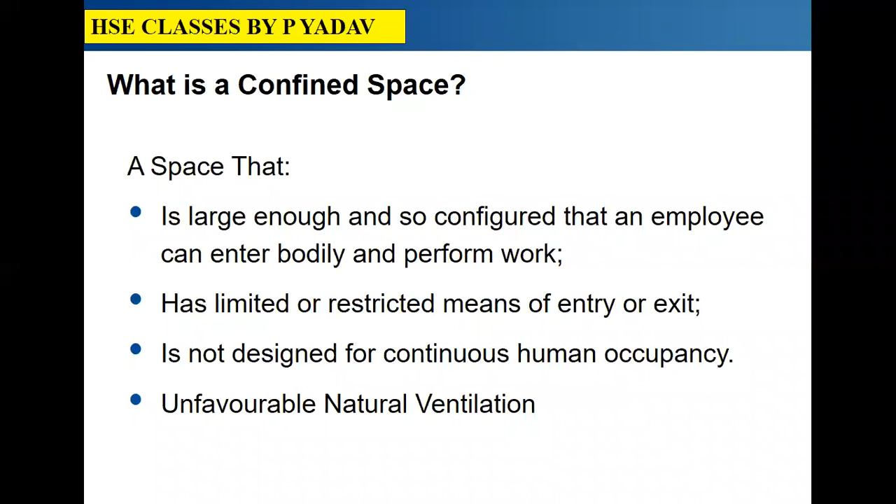What is confined space? A space that is large enough and so configured that an employee can enter bodily and perform work. A space that has limited or restricted means of entry or exit. A space that is not designed for continuous human occupancy. A space that has unfavorable natural ventilation. Just call it confined space.

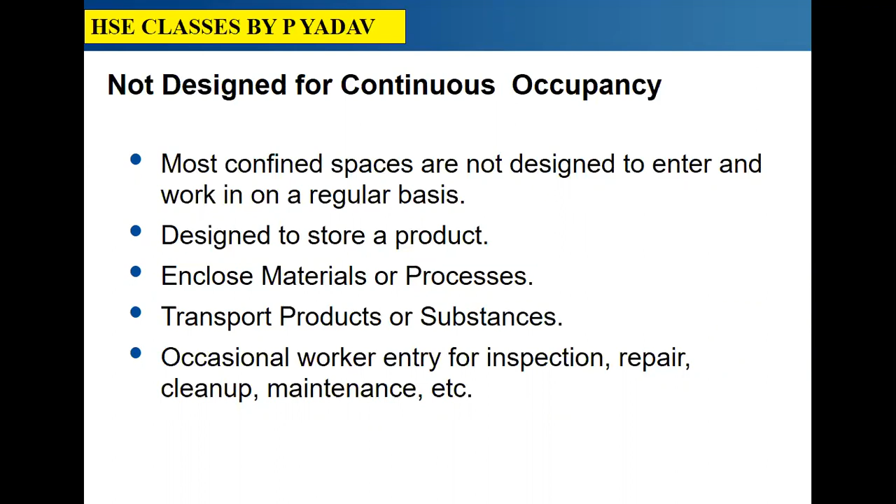Not designed for continuous occupancy. Most confined spaces are not designed to enter and work in on a regular basis, designed to store a product, enclose materials or processes, transport products or substances, occasional worker entry for inspections, repair, cleanup, maintenance, etc.

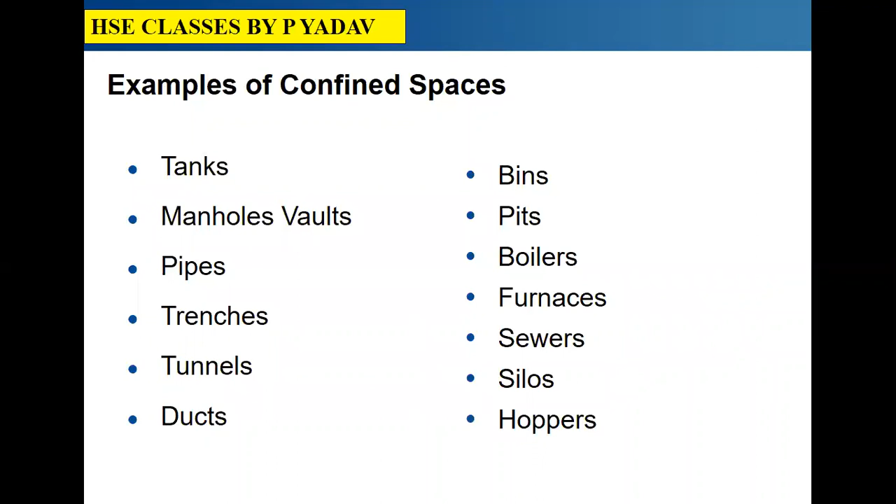Examples of confined spaces: tanks, manhole vaults, pipes, trenches, tunnels, ducts, bins, pits, boilers, furnaces, sewers, silos, and hoppers.

Potential hazards in confined space. Oxygen deficiency. Concentration. Combustibles: methane, hydrogen, acetylene, propane, gasoline fumes. Toxic materials: carbon monoxide, hydrogen sulfide, welding fumes, corrosives, electricity, mechanical hazards, mixers, crushers.

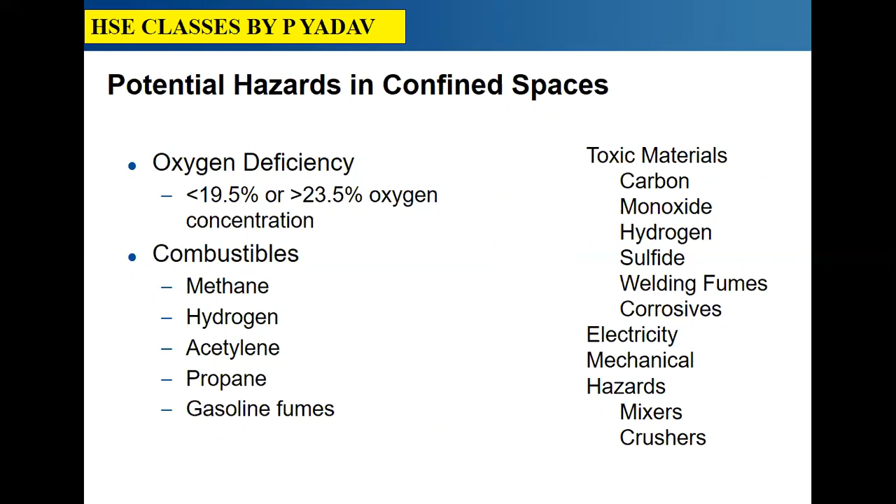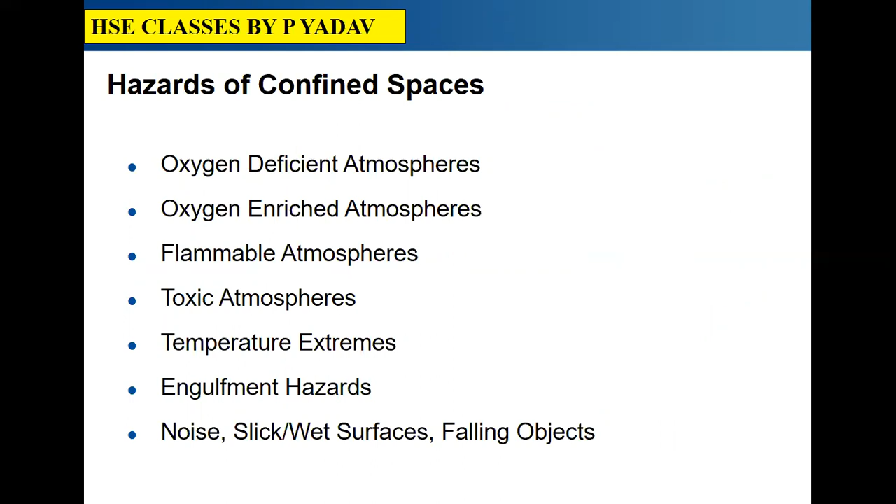Hazards of confined spaces: oxygen deficient atmospheres, oxygen enriched atmospheres, flammable atmospheres, toxic atmospheres, temperature extremes, and engulfment hazards, noise, slick, wet surfaces, falling objects.

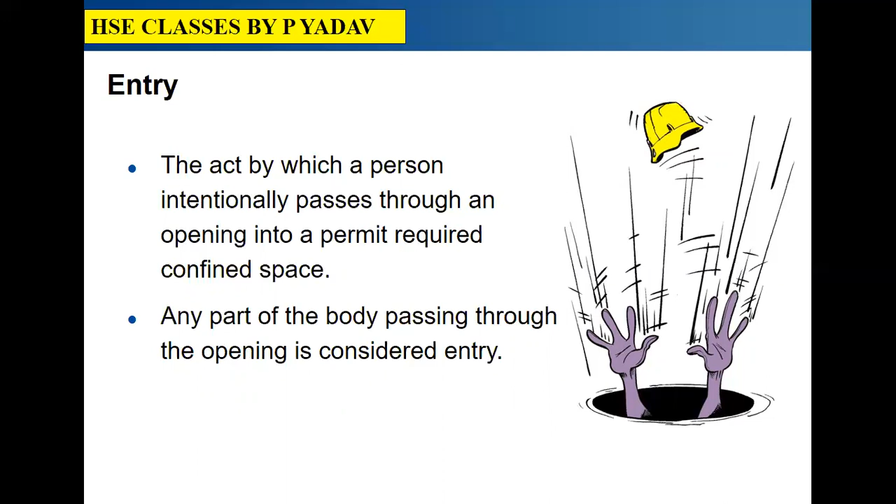Entry: the act by which a person intentionally passes through an opening into a permit required confined space. Any part of the body passing through the opening is considered entry. Immediately dangerous to life or health, IDLH. Any condition which poses an immediate threat to the health or life of an entrant, would cause irreversible adverse health effects, would interfere with an individual's ability to escape unaided from a permitted space.

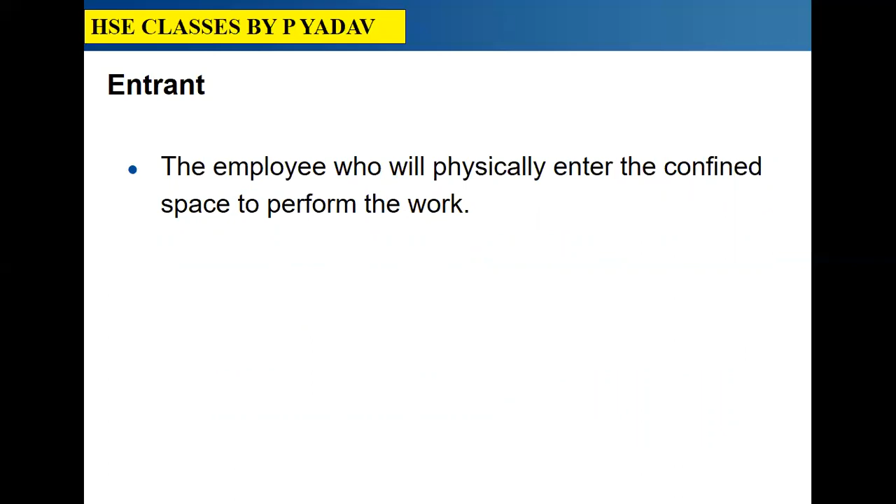Entrant: the employee who will physically enter the confined space to perform the work. Attendant: the employee who remains outside the confined space and monitors the entrants, guards the space against unauthorized entry, warns the entrants of any unusual conditions, and summons the rescue personnel if needed.

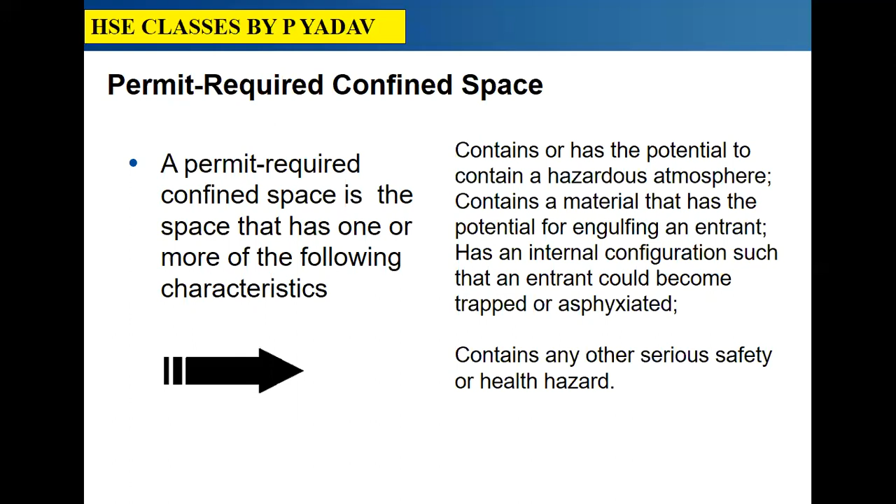Permit required confined space. A permit required confined space is the space that has one or more of the following characteristics: contains or has the potential to contain hazardous atmospheres, contains a material that has the potential for engulfing an entrant, has an internal configuration such that an entrant could become trapped or asphyxiated, contains any other serious safety or health hazard.

Categorizing workspace. Space large enough to enter and limited or restricted entry or exit and not designed for continuous worker occupancy. If no, not a confined space. If yes, then confined space. Hazardous atmospheres or engulfment hazard, configuration hazard, or any other recognized serious hazard. If yes, then permit required confined space. If no, non permit required confined space.

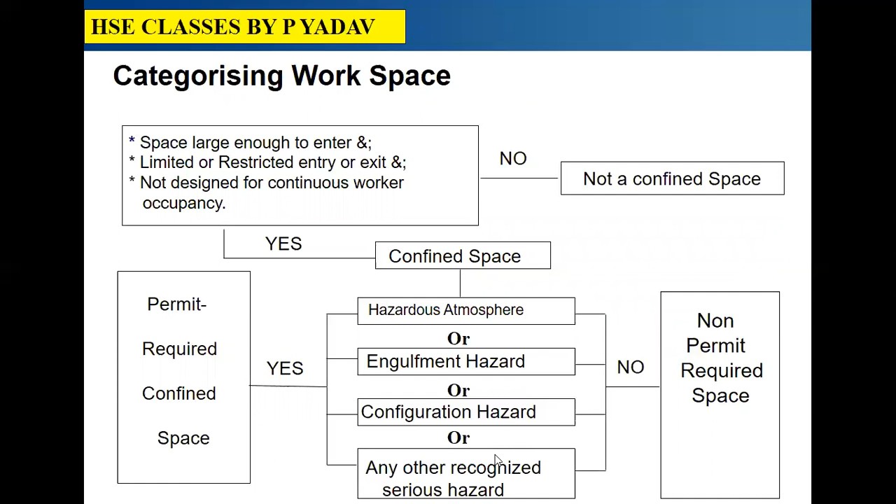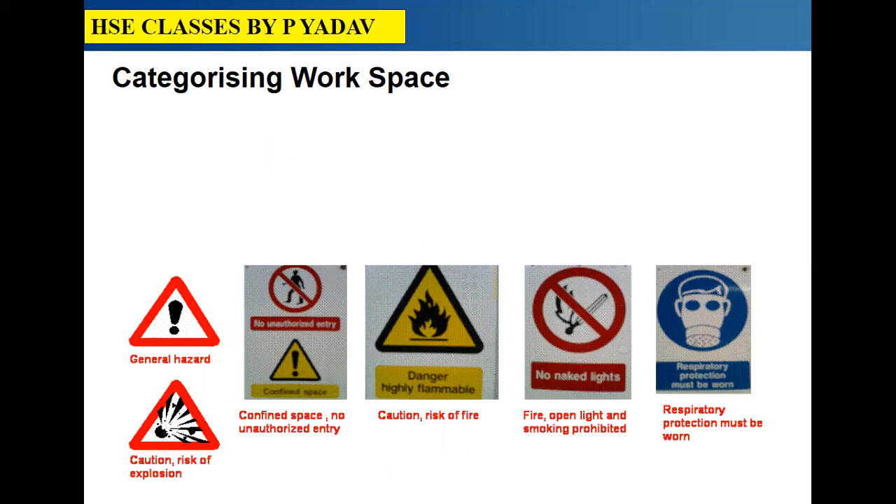Warnings. Warning signs shall be displayed at or near every access point to a confined space to warn persons of the existence of the confined space when entry to the confined space is possible. Such warning signs must be complied with.

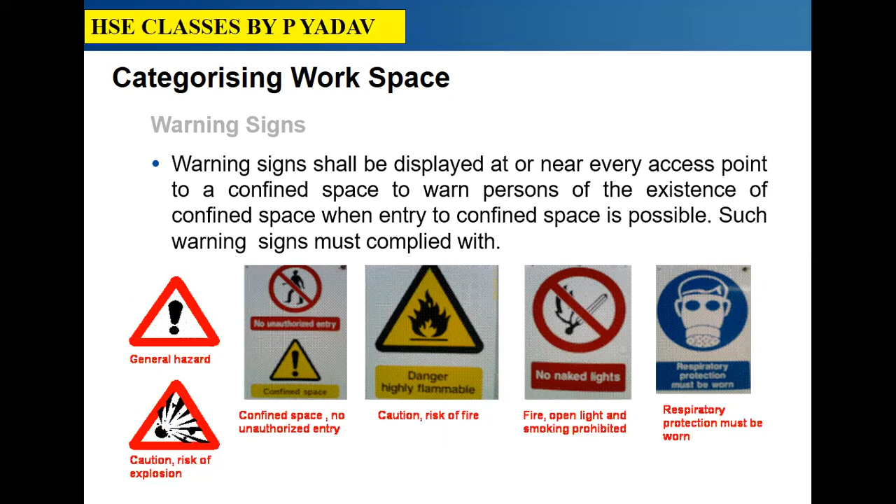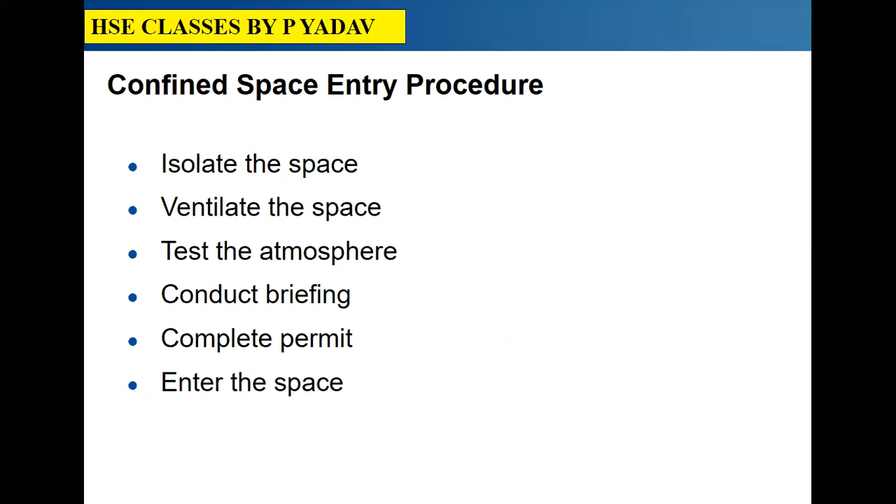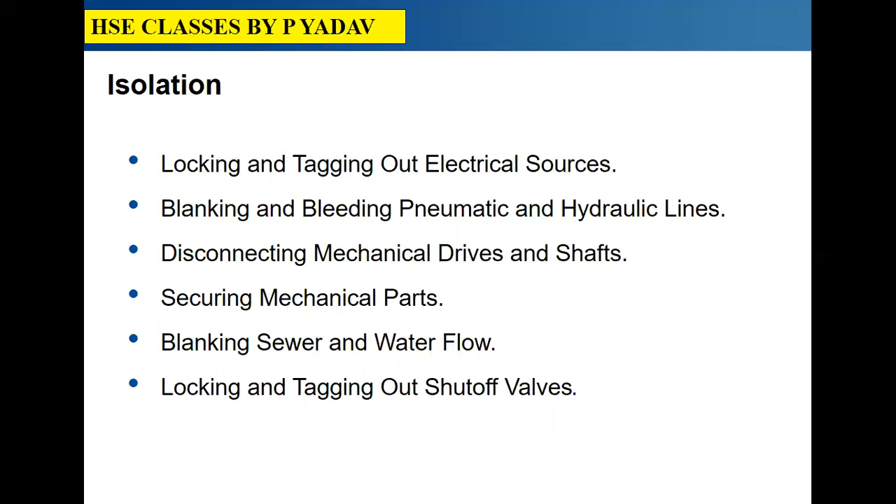Confined space entry procedure: isolate the space, ventilate the space, test the atmosphere, conduct briefing, complete permit, enter the space. Isolation: locking and tagging out electrical sources, blanking and bleeding pneumatic and hydraulic lines, disconnecting mechanical drives and shafts, securing mechanical parts, blanking sewer and water flow, locking and tagging out shut-off valves.

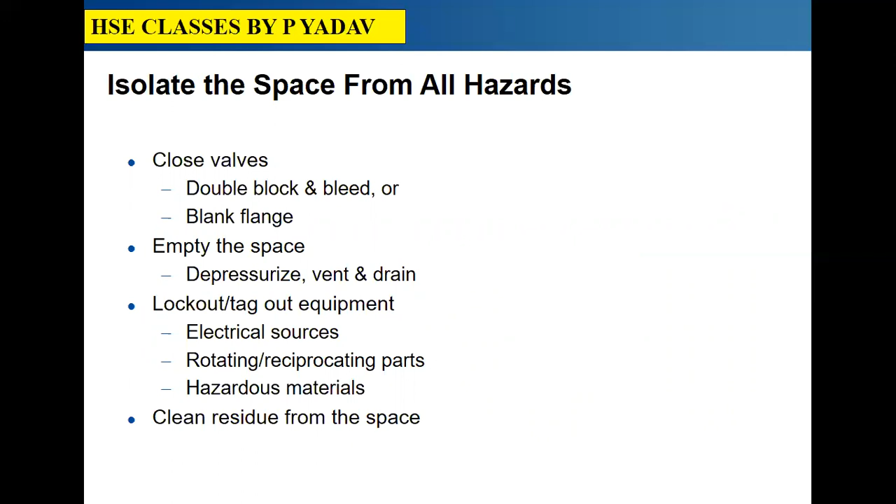Isolate the space from all hazards. Close valves, double block and bleed or blank flange. Empty the space. Depressurize, vent and drain. Lock out, tag out equipment, electrical sources, rotating and reciprocating parts, hazardous materials. Clean residues from the space.

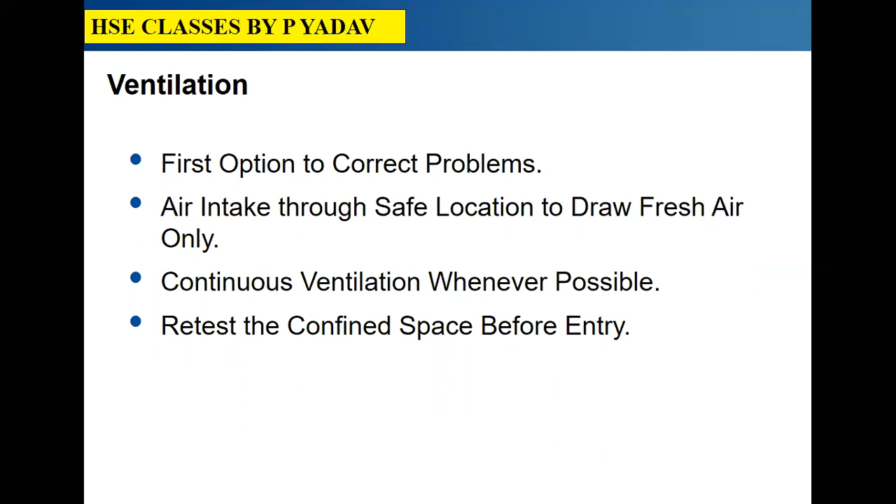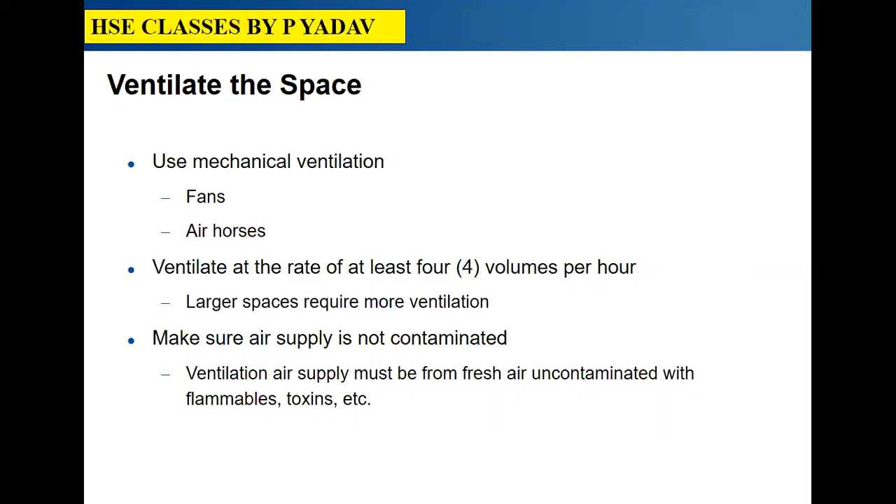Ventilation is the first option to correct problems. Air intake through a safe location to draw fresh air only. Continuous ventilation whenever possible. Retest the confined space before entry. Ventilate the space. Use mechanical ventilation, fans, air hoses. Ventilate at the rate of at least 4 volumes per hour. Larger spaces require more ventilation. Make sure the air supply is not contaminated. Ventilation air supply must be fresh air, uncontaminated with flammables, toxins, etc.

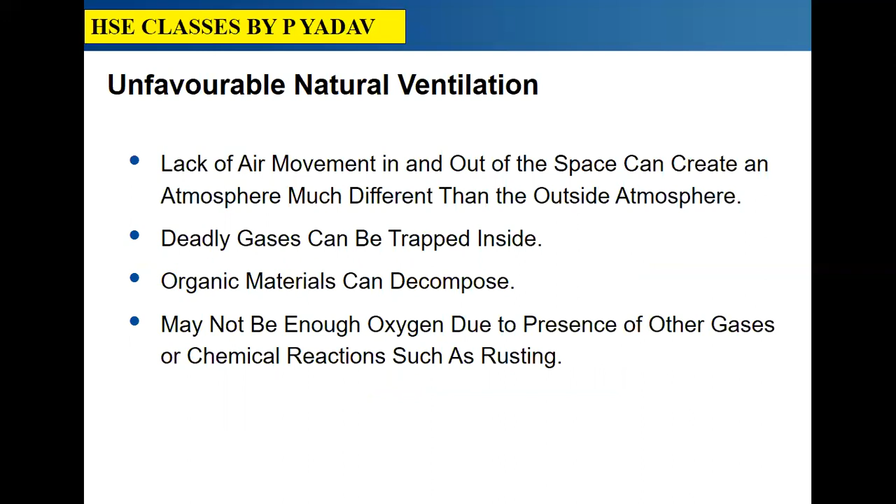Unfavorable natural ventilation. Lack of air movement in and out of the space can create an atmosphere much different than the outside atmosphere. Deadly gases can be trapped inside. Organic materials can decompose. There may not be enough oxygen due to presence of other gases or chemical reactions such as rusting.

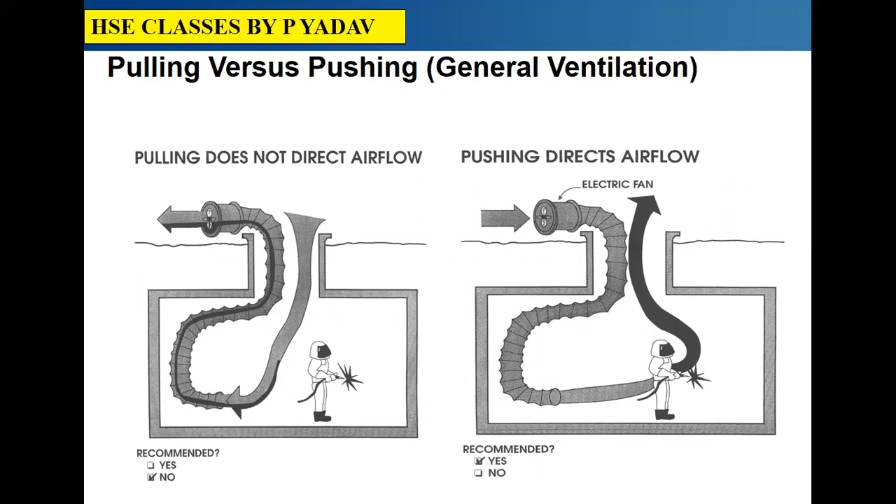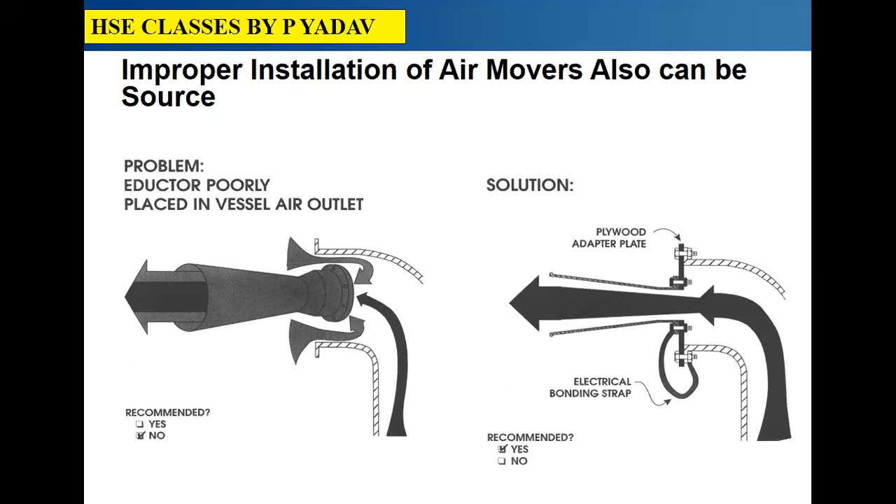Pulling versus pushing. General ventilation. Pulling does not direct airflow. Pushing direct airflow. Recommended: yes, no, no. Recommended: yes, no. The second option is the correct option. Controlling short circuiting. Improper installation of air movers also can cause problems. Eductor poorly placed in vessel air outlet. Solution: plywood adapter plate, electrical bonding strap. Recommendation: yes.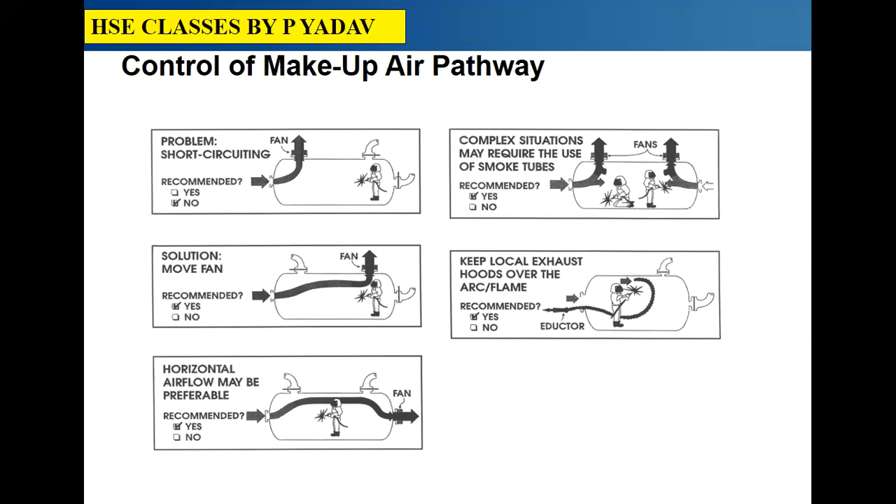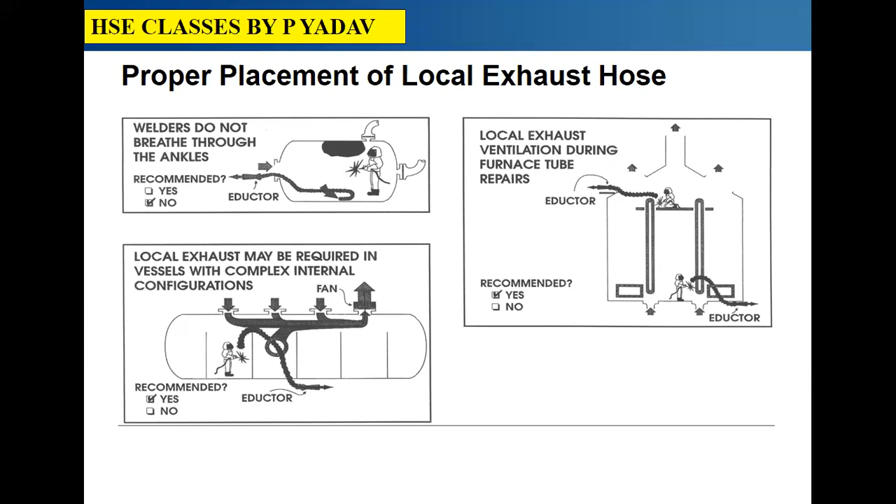Proper placement of local exhaust hose. What are the arrangements for the exhaust hose? As you can see in the pictures. Test the atmosphere. In order, check for oxygen content at least 19.5 and less than 23.5. Check for combustibles less than 10% of the LEL. Check for toxic gases, most commonly carbon monoxide, PEL 35 parts per million, or any other hazardous material as determined by the use of the space.

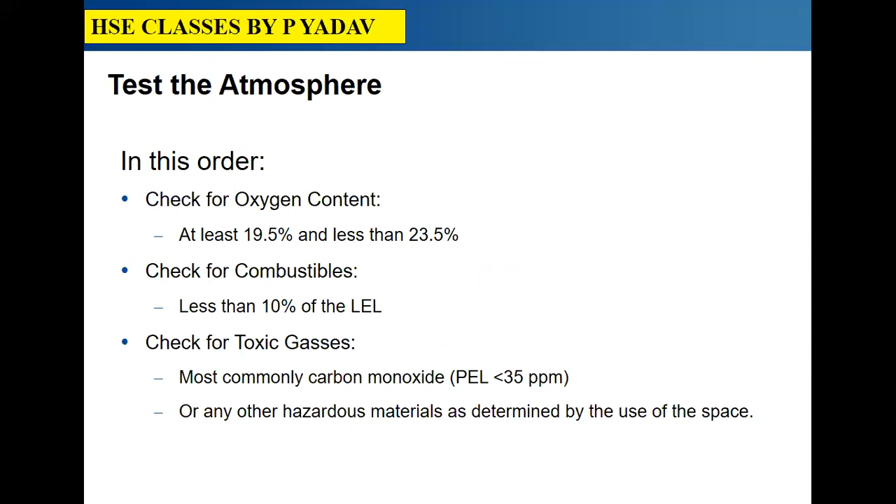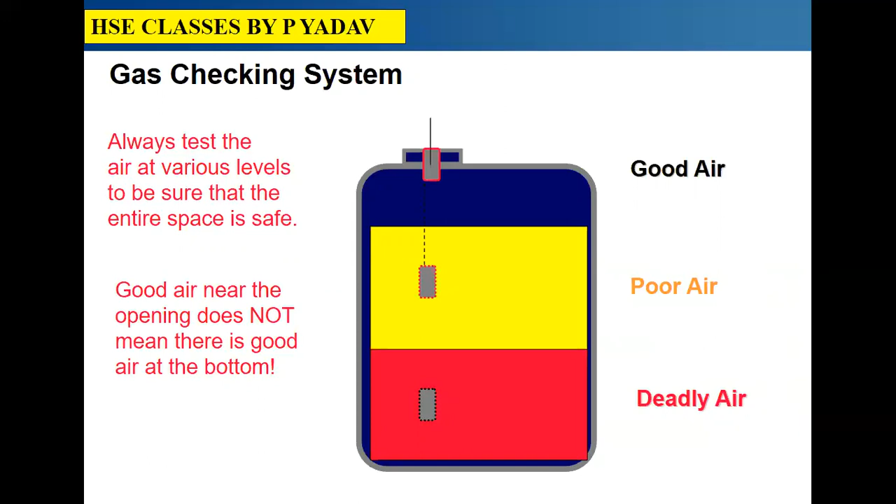Gas checking system. Always test the air at various levels to be sure that the entire space is safe. Good air near the opening does not mean there is good air at the bottom. Good air, poor air, and deadly air. Atmosphere testing shall be performed prior to every entry when the space is vacant, after a 10-minute ventilation period if ventilation is necessary, at least hourly for permit-required confined spaces, more frequently if conditions or suspicions warrant.

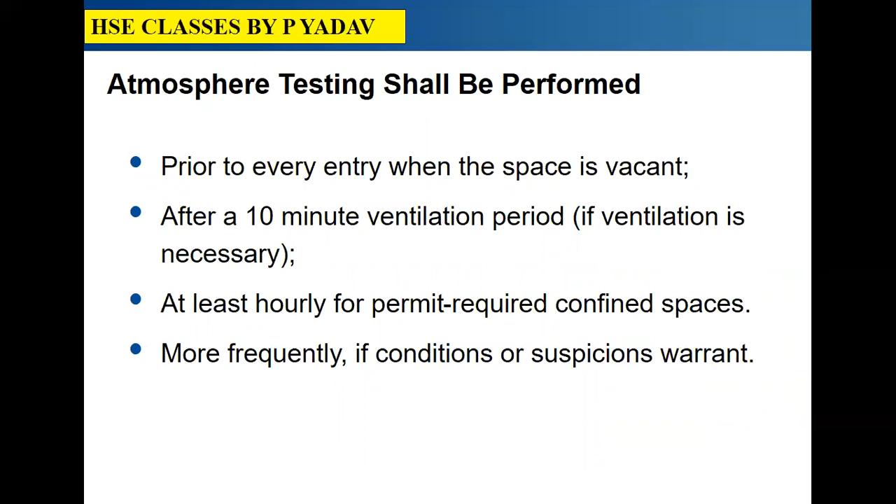Oxygen deficient atmosphere: 19.5% minimum acceptable oxygen level. 15 to 19%, decreased ability to work strenuously, impaired coordination, early symptoms. 12 to 14%, respiration increases, poor judgment. 10 to 12%, respiration increases, lips blue. 8 to 10%, mental failure, fainting, nausea, unconsciousness, vomiting. 6 to 8%, 8 minutes fatal, 6 minutes 50% fatal, 4 to 5 minutes possible recovery. 4 to 6%, coma in 40 seconds, then death.

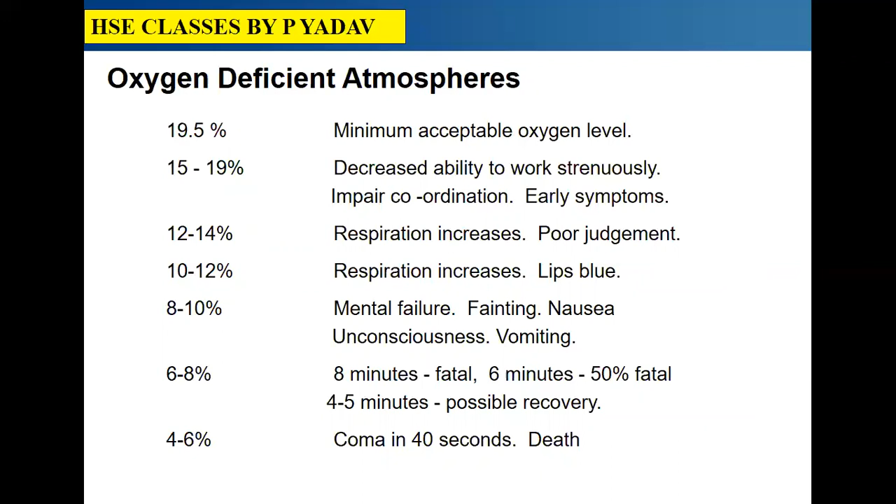Oxygen enriched atmospheres: oxygen level above 21% causes flammable and combustible material to burn violently when ignited. Hair, clothing, materials, etc. Oil soaked clothing and materials. Never use pure oxygen to ventilate. Never store or place compressed tanks in the confined space.

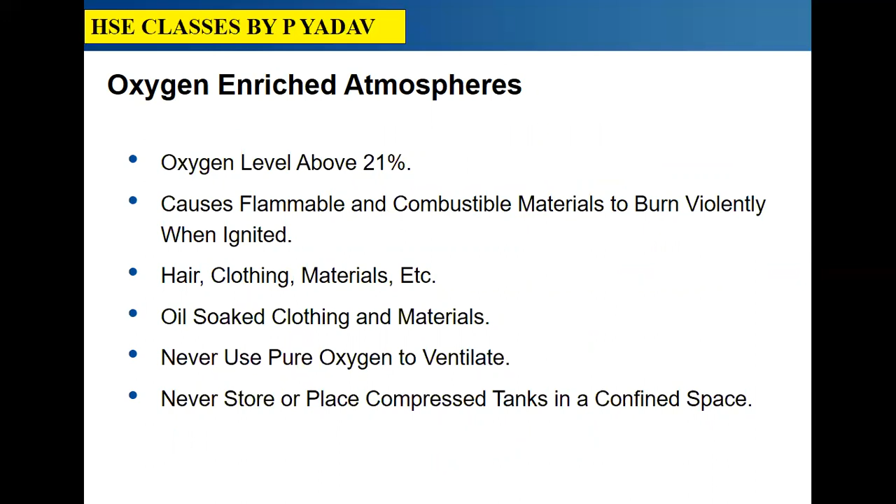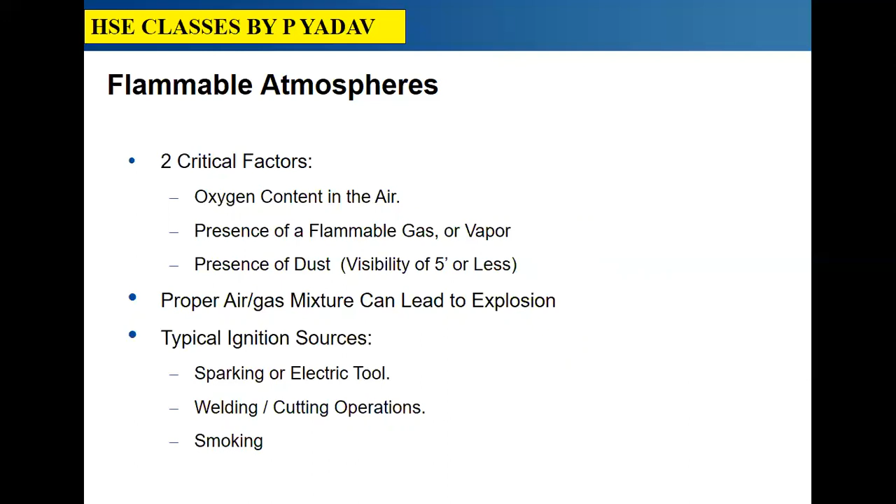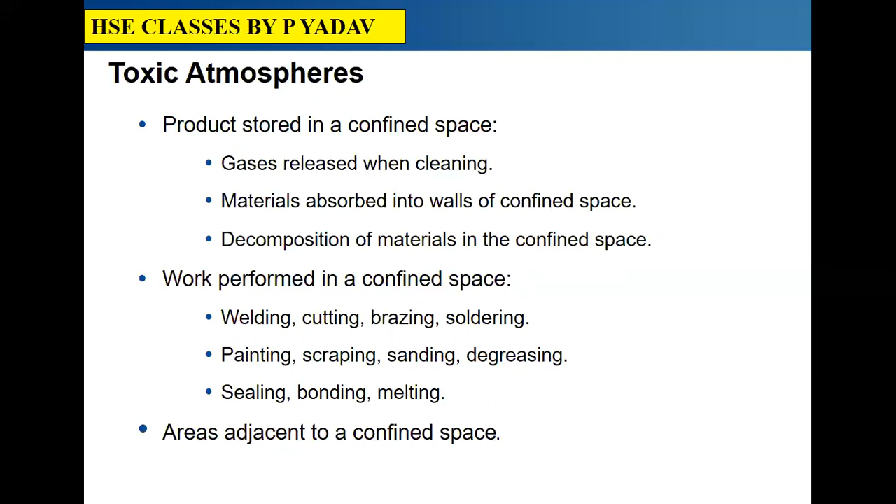Toxic atmospheres. Product stored in the confined space, gases released when cleaning, materials absorbed into walls of the confined space, decomposition of materials in the confined space, work performed in the confined space: welding, cutting, brazing, soldering, painting, scraping, sanding, degreasing, sealing, bonding, melting. Areas adjacent to a confined space. Hydrogen sulfide: decomposition of material, human waste, rotten egg odor at low concentration, possibly no warning at high concentration. Parts per million, effect, time as you can see in the chart.

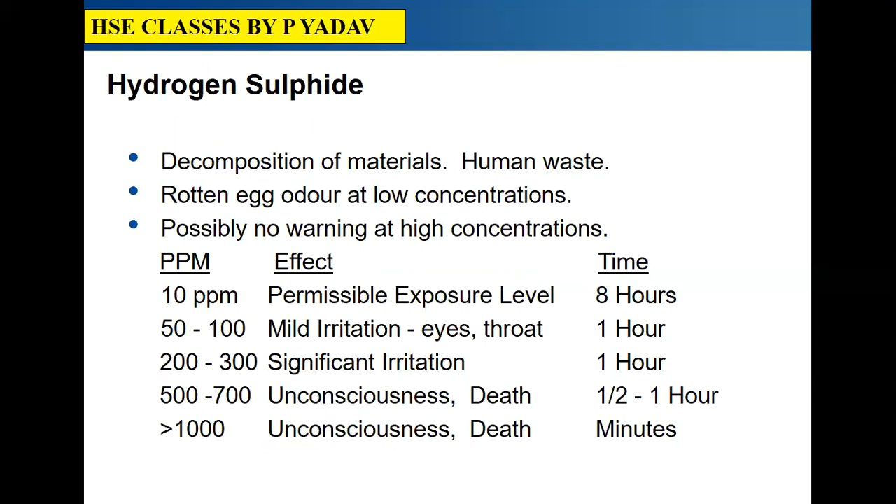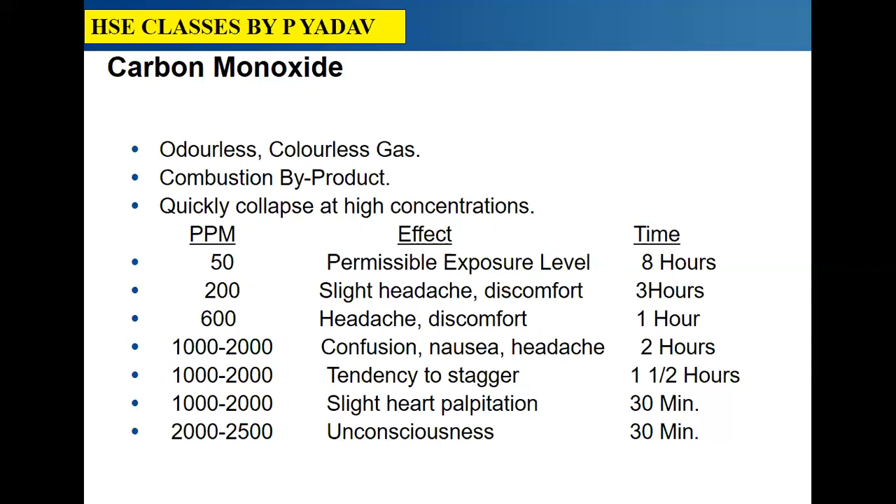Carbon monoxide: odorless, colorless gas, combustion byproduct, quick collapse at high concentration. This is the parameter of parts per million, effect and time for carbon monoxide.

Conduct briefing. Entire crew must attend: attendants, entrants, entry supervisor. Review hazards of entry and work, review PPE, review procedure for contacting rescue, verify rescue available, complete permit. Training and education.

All workers must enter confined space training. All attendants and rescue team members: prior to initial work assignment. Retraining: job duty change, change in permit spaces program, new hazards are present, job performance indicates deficiencies.

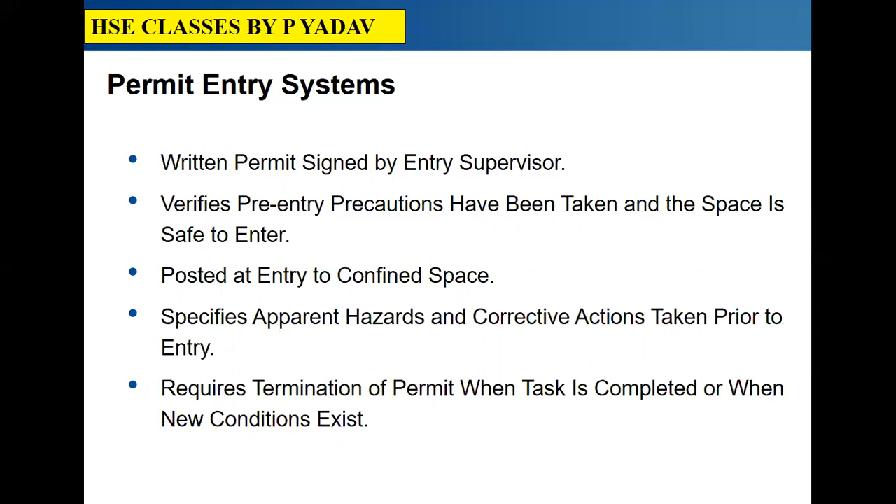Permit entry system. Written permit signed by entry supervisor, verifies pre-entry precautions have been taken and the space is safe to enter, posted at entry to confined space, specifies hazards and corrective action taken prior to entry, requires termination of permit when task is completed or when new condition exists.

Complete entry permit form. Permit must be correctly and completely filled out prior to entry. Permit must be activated by entry supervisor signature to be valid. No entry is allowed without a valid permit. Permits are valid for up to 8 hours. When permit is completed, permit and tailboard form should be returned to safety. Cancelled permits must be kept on file at least 1 year.

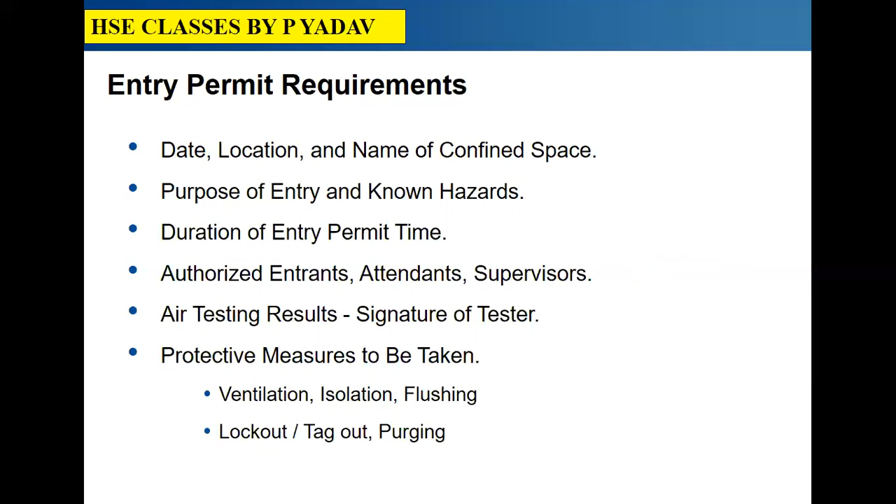Entry permit requirements: date, location, and name of confined space, purpose of entry and known hazards, duration of entry permit time, authorized entrants, attendants, supervisor, air testing results, signature of tester, protective measures to be taken, ventilation, isolation, flushing, lockout/tagout. Entry permit requirements: name and phone number of rescue or emergency services, communication procedure, special requirements and procedures, personal protective equipment, alarm procedure, rescue equipment, respirators.

Enter the space and proceed with work. An attendant shall be posted near the entrance for the duration of the work. He shall be in constant communication with the entrants while the job is in progress. All entrants shall sign the sign-in log when entering the space and sign out when exiting. The attendant shall maintain the permit and sign-in log for the duration of the work.

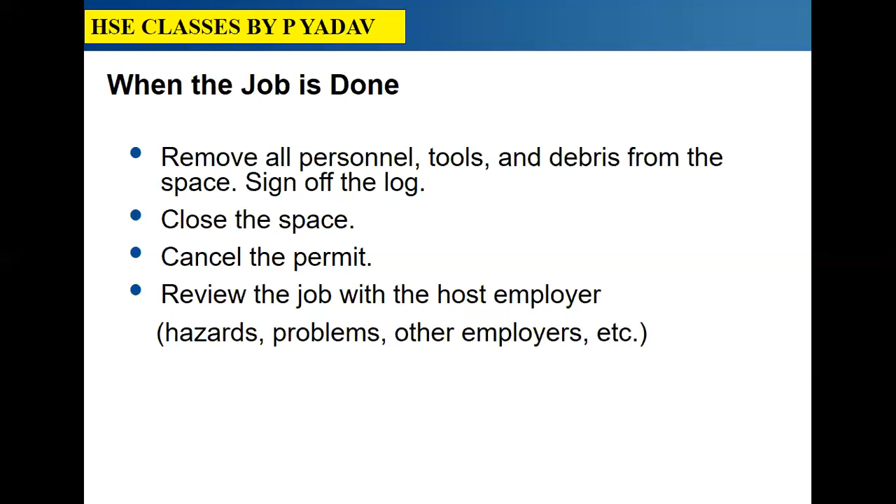When the job is done, remove all personnel, tools and debris from the space, sign off the log, close the space, cancel the permit, review the job with the host employer: hazards, problems, other employers, etc.

Attendant responsibility: to monitor entrants during the job and during entry and exit to help ensure their safety. The attendant may not abandon this post for any reason while personnel are in the space unless relieved by another qualified attendant. To monitor atmospheric conditions in the space prior to and during entry, to control access to the confined space, to summon emergency assistance as needed, to assess hazards in and around the space and take action on the same. To keep records of confined space work such as air test results, personnel entry, exit, etc.

Entrant responsibility: to assure that the space has been adequately ventilated, isolated, inerted, or otherwise made safe for entry. To immediately exit a space without question upon word of the attendant, no matter what the reason. To follow all safety rules and procedures that may apply on the job. To be familiar with the work to be performed and the other procedures that apply to the job. To use the appropriate PPE whenever necessary.

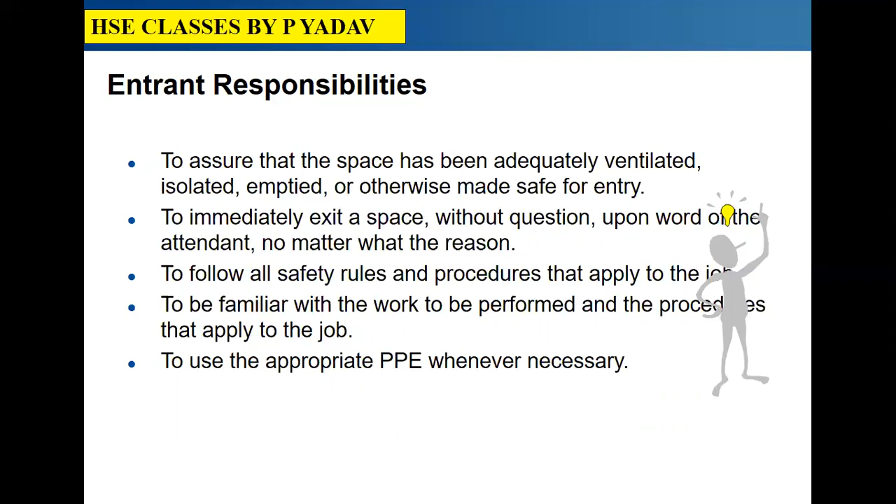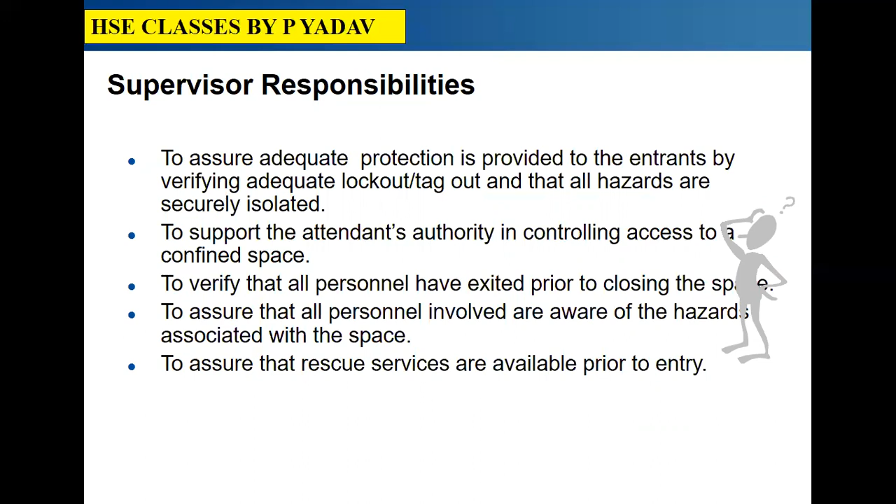Supervisor responsibility: to assure adequate protection is provided to the entrants by verifying adequate lockout/tagout and that all hazards are securely isolated. To support the attendant's authority in controlling access to a confined space. To verify that all personnel have exited prior to closing the space. To assure that all personnel involved are aware of the hazards associated with the space. To ensure that rescue services are available prior to entry.

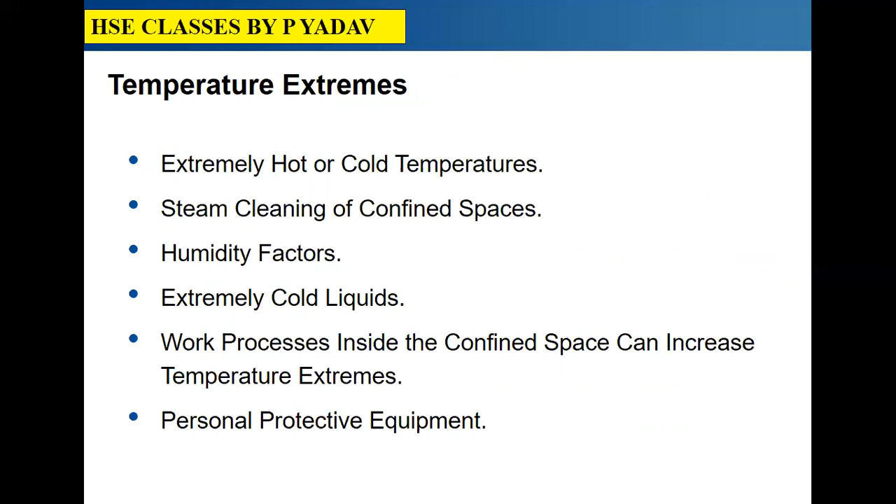Temperature extremes: extremely hot or cold temperatures, steam cleaning of confined space, humidity factors, extremely cold liquids. Work processes inside the confined spaces can increase temperature extremes. Personal protective equipment. Other hazards: noise, amplified due to acoustics within the space, can damage hearing and affect communication; wet surfaces, slips and falls, increased chance of electric shock; falling objects, top side openings expose workers inside confined space to falling objects.